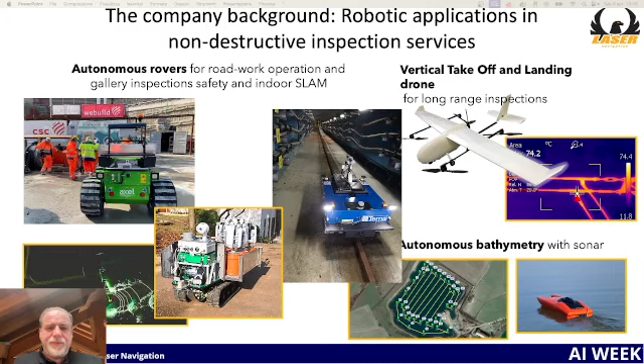Understanding the context is crucial for this reason, for the assisted automatic operation by specialized staff. This is the beginning of robotics development within our company.

It launched in 2008. I am one of the founders of ArduPilot, an open source project that several systems rely on today, developed as a professional tool advanced in the field of research and development.

In 2014, we worked a lot on miniaturization, and we continue to work a lot on that. From 2015 to 2016, we began the evolution of robotic systems integrating artificial intelligence, up to today, where we have integrated our key platform, which is SophyAI.

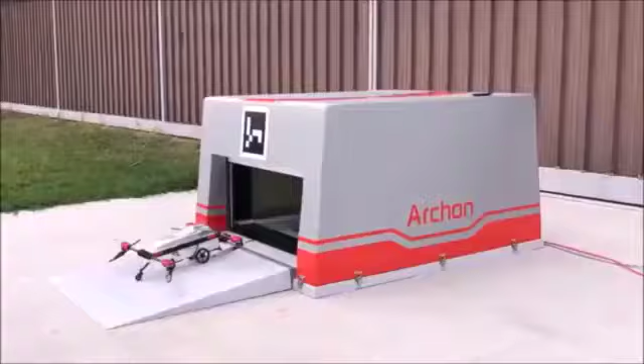These are some use cases we've worked on in the past. One of the most interesting is precisely what we have a patent for, with which we previously collaborated with a startup called Archon for the realization of autonomous drones capable of landing and taking off autonomously from a platform, charging, carrying out its missions, and then returning to the starting point ready for the next one.

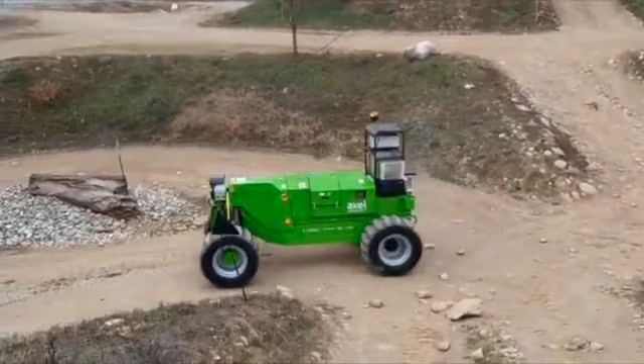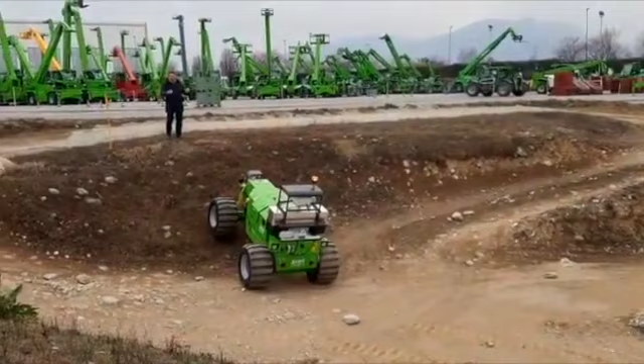Definitely Axel. Axel is a robot that was commissioned to us by a research project developed with CIM 4.0 and with Reply. Basically, it gave us the chance to develop a platform based on Merlo, which is a self-builder of vehicles. In the industrial field, we included everything related to navigation, teleoperation, and collision avoidance during activities.

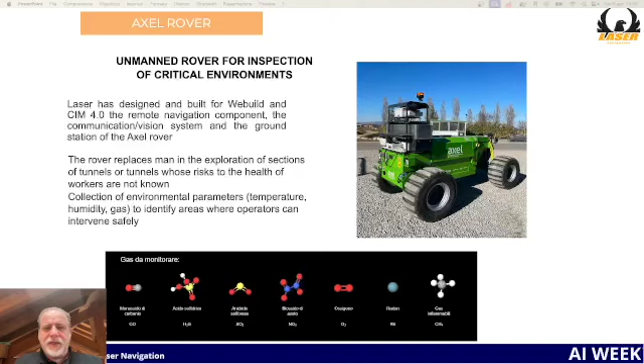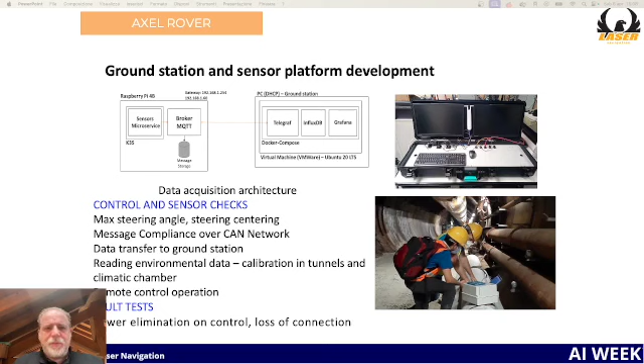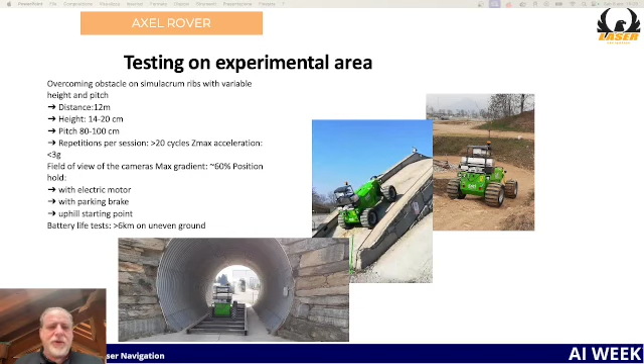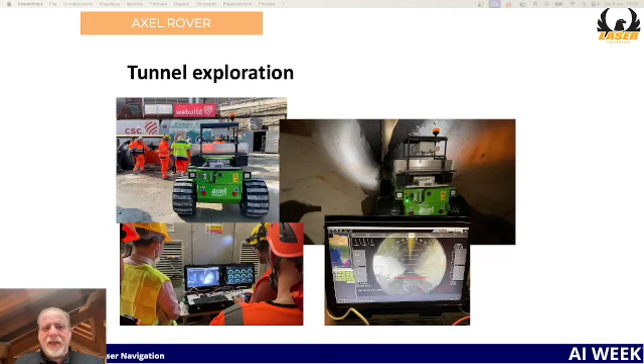Yet another image where we can see the ground station and the operators, who also monitor all the environmental parameters inside the tunnel before letting staff in.

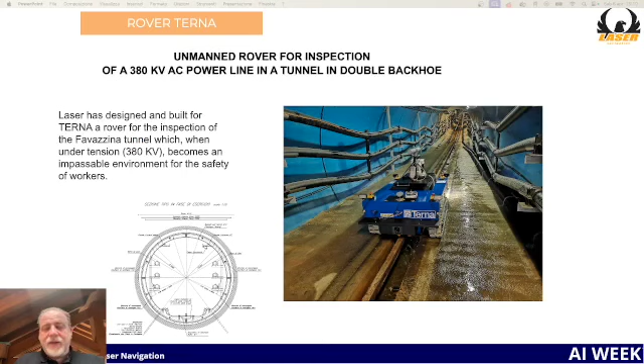This is a very complex environment since the electromagnetic field generated by the electrical triads is very strong. Our robot, besides being teleoperable, conducts its inspections with thermal cameras in the visible spectrum and has environmental sensors. It also has a shield that protects it from electromagnetic emissions.

This is the next one - another screenshot of this robot we made. You can see the antenna, the control antenna, and the inspection camera, the thermal camera. The tools in this case are singled out.

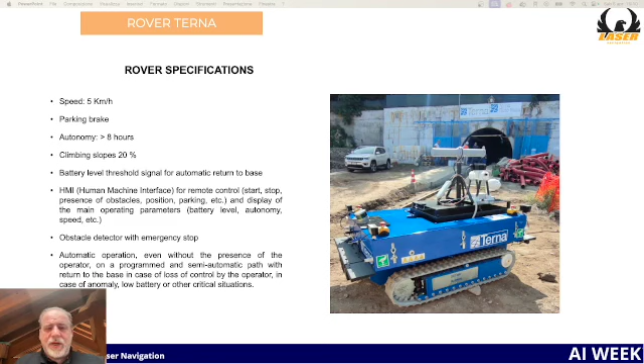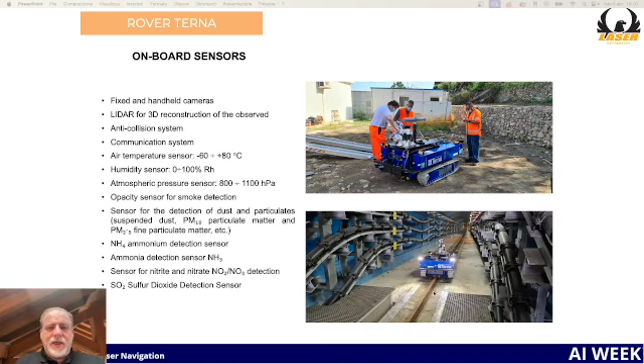Other screenshots and other perspectives, such as integrating the rover into the tunnel. In this case, the rover also has lights that illuminate its path, and it can operate by following this track.

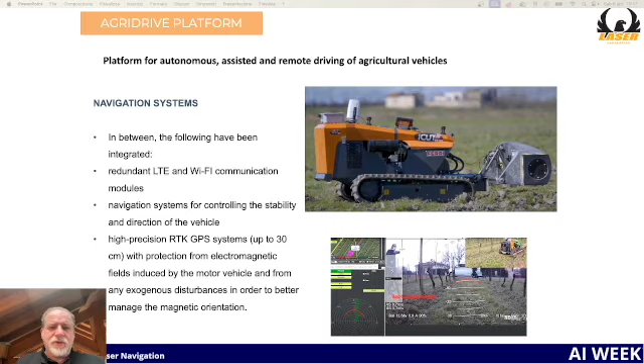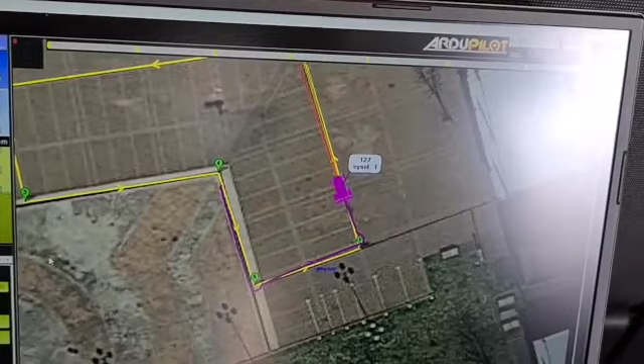This is another robot we made for more agricultural applications, always remotely operated, always autonomous, that can be used for environmental inspections. This is a sensor that was specifically made for conducting specific soil quality surveys.

In addition to robots, we have also extensively developed custom command consoles or ground stations, which somehow went toward solving user experience issues.

In the robotics field, besides aerial and terrestrial robotics, we have worked on the creation of marine drones. In particular, we've created a robodinghy, a dinghy equipped with artificial intelligence and a remote piloting teleoperation system, created for experimental activities in environmental or support check contexts. It's just an experimental project we've been working on for a while.

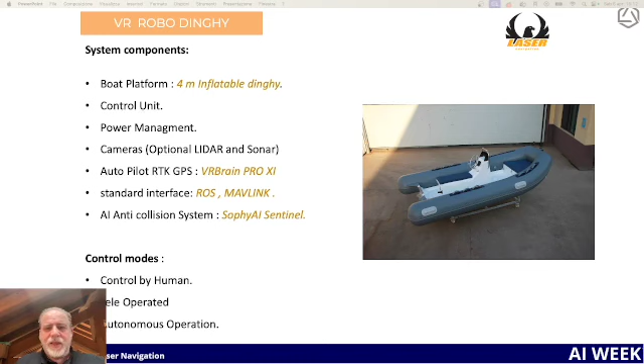On the robot we have installed advanced techniques like LiDAR systems or underwater inspection systems, allowing us to implement various types of services. For instance, bathymetry spot checks, or through the use of a side scanner, also analysis. Here is a video of a side scan sensor connected aboard the robot, which allows us to scan right away.

We are also currently developing a version that can go as deep as about 250 meters to observe relics more closely, or situations in which we just manage to take action to perform certain operations.

What's interesting is that images from side scanners can also be analyzed by specialized artificial intelligence systems, in such a way that you can already reference the various objects presented, recognized more closely by artificial intelligence, possibly later with ROVs.

Another product being made for the marine environment is the IVRB. It's based on our Voyager Captain autopilot, connected through 4G and 5G routers to a control system that coordinates its movement in swarm mode with the other buoys that make up the field, for example for a sailing regatta.

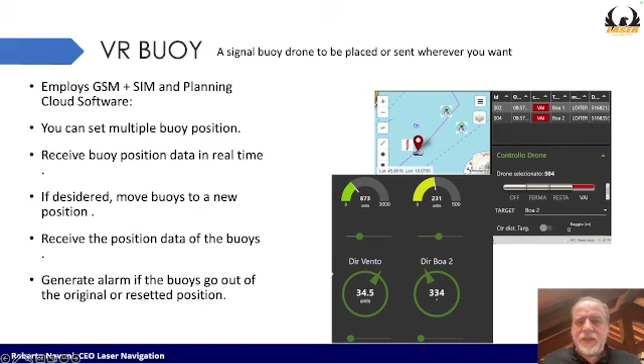The application can work both in the cloud and on soft devices. All those experimental projects were developed within our field test on Lake Iseo.

The field test is located around Monte Isola Island. Essentially, we have about 30 kilometers of path around the island available for our experiments.

Besides conducting experiments on the surface, sailing both by sail and by motor, even with electric means, and in the future also with foiling systems, we will be able to cover 200 or 300 kilometers of track in a day of experimental journeys.

Moreover, this area is also suitable for underwater experiments. Indeed, the depth is 270 meters, which is sufficient for rather complex experimentation. These conditions are hard to find in marine areas so close to the coast.

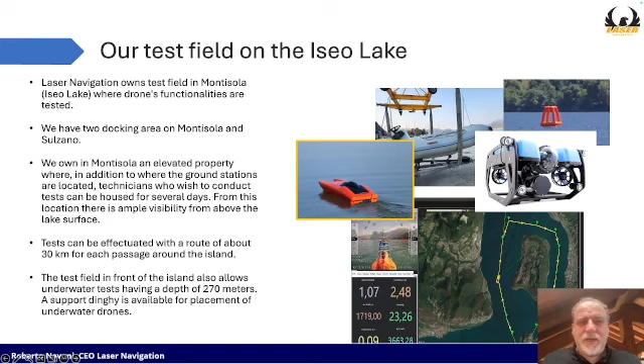After our experience in robotics over the last years, we realized how robots in complex scenarios such as a dam, a power plant, or even an industrial plant face an issue when moving within these infrastructures: their sensors have limits and restrictions. Volumetric analysis cannot go beyond to analyze the areas of a plant where the robot will have to go, for instance moving over infrastructures or near people.

So what we realized is that the robot alone does not have the ability to perceive the entire environment in which it will have to move. And from here came the idea of SophyAI.

Understood as a digital twin, able to start from images of a real scene, reconstructing a real-time 3D model of the environment, that somehow allowed robots, but also possibly first response teams, to take action inside the plant and that infrastructure.

From this idea, which developed in 2018, we first made a deposit of an Italian patent. This patent was recognized in 2020, and then in September 2023 the European patent was also recognized. We are still waiting for the American patent, which allows us to continue developing this technology with peace of mind.

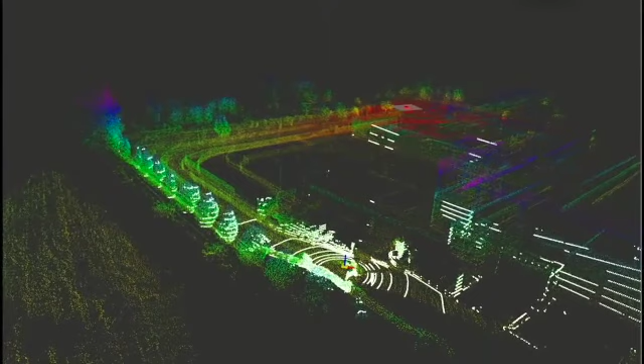Moreover, we can mix both LiDAR and cameras to monitor progress, the human growth of a construction site, but also to check the behavior of people in the middle of the construction site to prevent potential issues to staff working within these infrastructures. The system is equipped with multiple heterogeneous sensors among themselves, and this allows us to have more confirmations, for example, of a behavior of a scene happening within a site infrastructure.

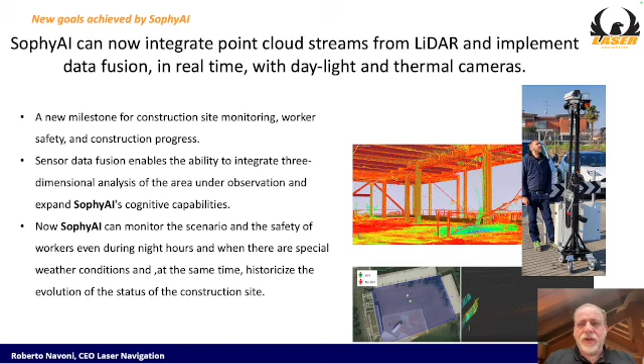This is a very important topic in strategic contexts, like the smart road, where the importance of multiple checks to validate a situation is definitely important. Our goal is to create an artificial intelligence system that monitors a scenario 24 hours a day, 365 days a year, creating a risk management dashboard to always keep risk within acceptable safety parameters for the company.

Worker safety - we can check for violations of rules and processes. We can check for any illnesses, staff issues, or realize a count of incidents through smoke sensors, fire, or even sound, or unauthorized access or intrusion by people into unauthorized areas in the field of smart road.

Here too we have carried out various research and development activities and also consolidated technologies, significant tasks, both in terms of vehicle classification and the management of emergency and protection measures with a view to preventing collisions in areas within construction sites, rather than man-down checks, fire detection, and intrusion detection always within facilities.

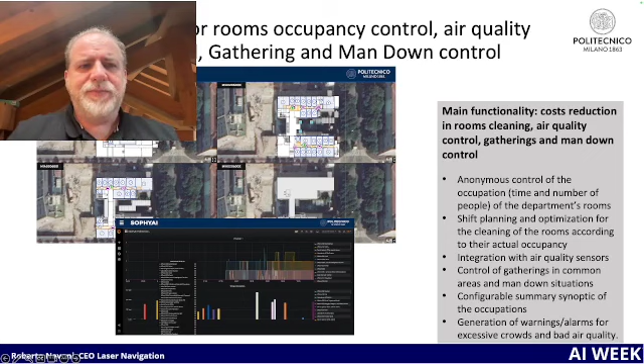We then developed another interesting use case with the Politecnico di Milano, where we implemented a system for monitoring people's presence in various rooms. In its latest revision, this also implemented a logic of integrating IoT sensors to monitor CO2 levels in different rooms, specifically at their occupancy level.

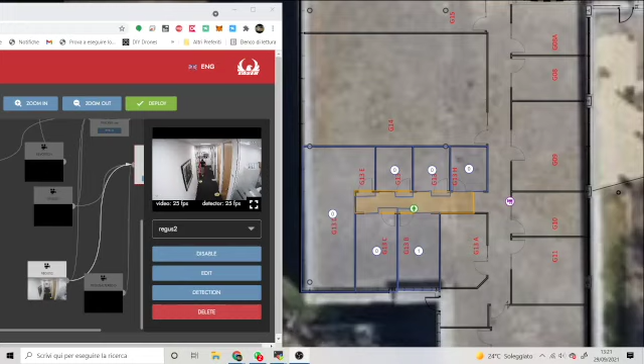That's even a decidedly fascinating use case. The use of artificial intelligence together with the Internet of Things, through comparative data analysis, lets us obtain a whole series of information that IoT sensors alone did not allow us to obtain, such as the number of people occupying a space. We then implemented control systems for plants to check access security to various areas.

We implemented access control for the parking area, the loading and unloading area, and also systems of automation and integration for gate opening or activation of systems within industrial plants. In this case too, we have another industrial facility where we control vehicle access and traffic flow.

In this case, we also have a theme of areas to be monitored to prevent vehicles loaded with flammable materials from parking near critical areas. We have both an AI solution and a solution with a smartphone, so the systems interact with each other.

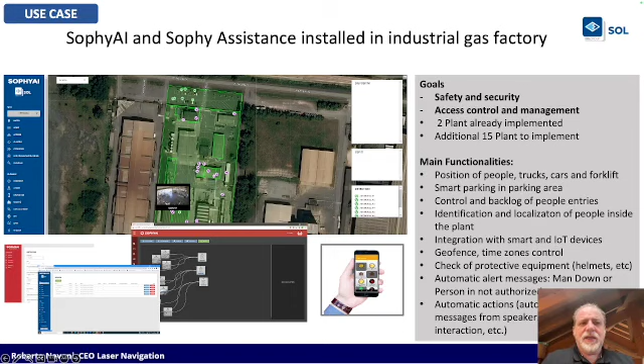This allows integrated localization of both people with smartphones who collaborate and those who do not collaborate but may be present. The comparison between collaborative and non-collaborative subjects allows us to highlight unauthorized intrusions in some areas, in this case also within a client's facility.

We have implemented control logics for a cryobank, where we're trying to manage gases in the area that have no smell which can lead an operator to faint, and in the most critical cases, to death due to oxygen deficiency.

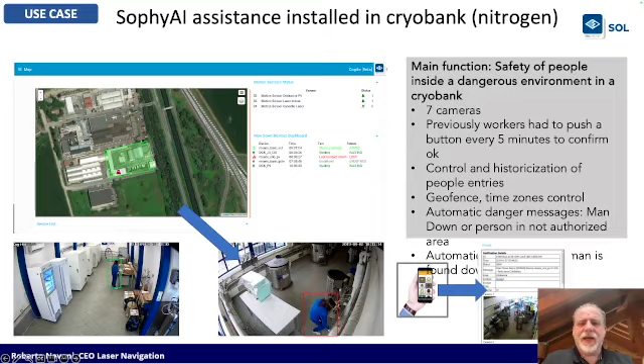The system can detect these issues, generate alarms, and automatically activate ventilation systems to restore oxygen levels inside the area to normal levels, then alerting emergency teams in full.

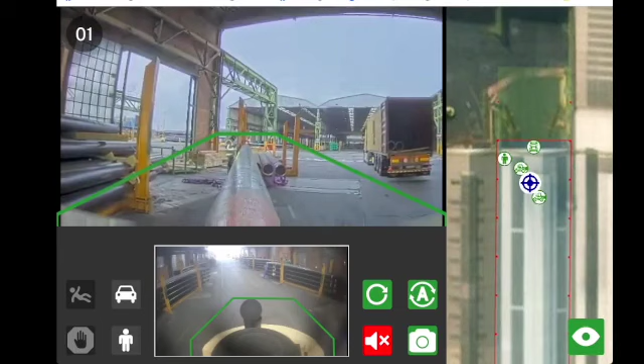Another system we have implemented is both forklift and people anti-collision inside facilities. We have a whole series of projects with various customers on collision avoidance between vehicles and people, and this too is a very hot topic where artificial intelligence can help a lot.

There is a strong need for network training because in complex environments many networks are not available, so they must be trained from scratch. It incurs quite significant implementation costs. We have gained experience training in various scenarios, and this allows us to be quite flexible in improving.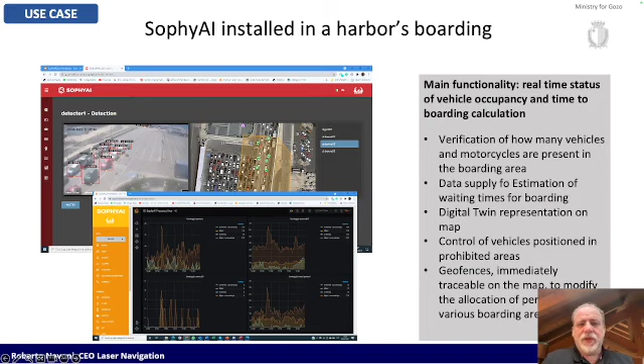This is a solution that the Ministry for Gozo has adopted, for control access to its ports. In this case, however, we have developed and tested systems.

The systems do tracking and control of behavior within infrastructure such as tunnels. This was also a project that allowed us to gain experience in this field.

Another project that also won us an award with Bosch was a smart parking project. In this case, the project was done in a period where artificial intelligence was only recently applied in the field of parking, showing significant potential compared to the more traditional techniques of image processing.

Image processing is slower and less precise. Artificial intelligence can be much more accurate and much faster at detection of cars, of vehicles, of people. This allows for the implementation of much more efficient algorithms to create smart parking solutions.

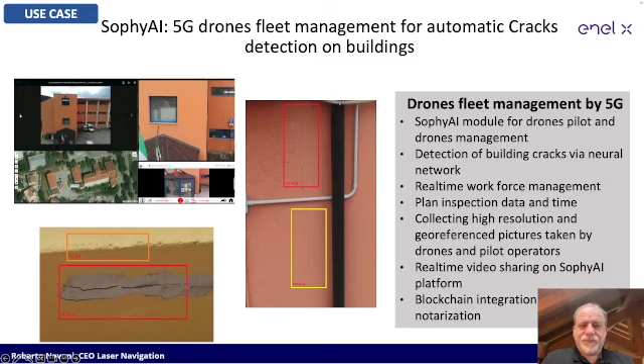We then worked on projects with Enel X for crack recognition on infrastructure for the L'Aquila reconstruction project, where we also experimented with 5G transmission from drones of these images to a control center that then analyzed the data collected, identifying infrastructure criticality as detected by AI from drone data.

These use cases are some of the most interesting, and now we will go on to see a new solution related to generative artificial intelligence applied to workflows. Besides creating digital twins using techniques of artificial intelligence, as we discussed in previous presentations, one of the major topics is precisely creating efficient workflows to identify and apply the rules to these digital twins, to generate alarms or manage extremely critical situations in these scenarios.

From here, a path of analysis began almost a year and a half ago on generative AI, specifically language analysis. This kind of analysis led us to create a strong and significant background in the knowledge of these trainings - AI LLM algorithms - with the aim of tackling complex topics, making the most of it.